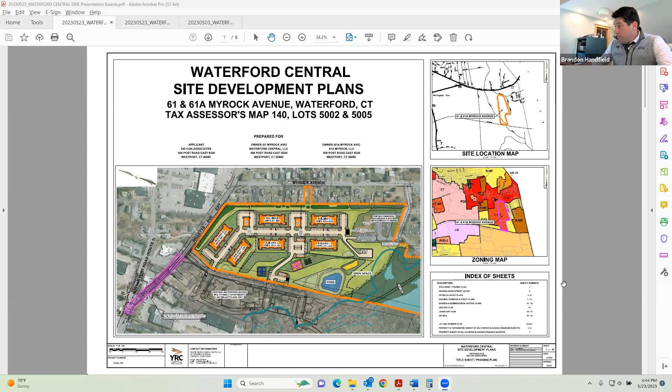So I will go into our proposed development, which consists of 6 multifamily buildings with 36 units each. Going back to the 2022 Design Review Board, these buildings are the same as building E and F that we proposed as part of phase 2 Waterford Woods. So each of these 6 buildings shown in orange, G through L, are the same building that are built on Waterford Woods out back here off the page. We'll get into the architectural styles later, but I want to say you have basically the same exact building that we presented before and are currently under construction.

Access, as I said, to the site will be connected to the existing driveway network, as you can see here. This is actually a Bing aerial map that I was able to pull in to show you the status of construction of Waterford Woods. So you see building A, building B, building C, building D - the foundation was in at that time, it's now almost nearly complete. You can also see the existing intersection with Willetts Avenue here that has been built, and that will be our main access point as well.

In terms of the layout, there will be a looped layout that will connect at the main driveway and head eastward and then southerly, connecting back into Waterford Woods at this rear intersection between building A and building B. There will be a spur that heads out to the south towards Atlantic Broadband that will serve building K and L and the parking for them. However, this will be a dead end, so it will not have a connection out for traffic purposes to the existing Atlantic Broadband development or to Myrock Avenue. There will be a fence installed here that will prohibit any through access except for emergencies and maintenance.

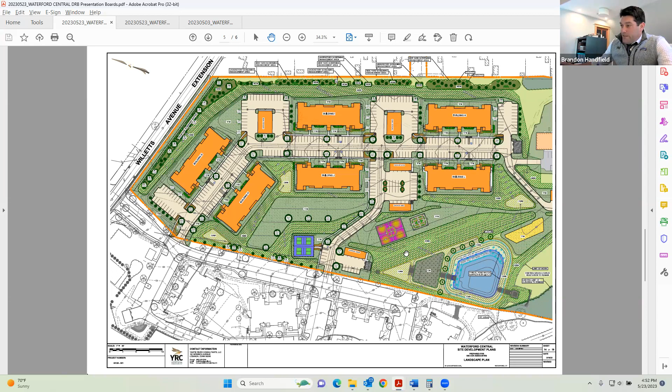And just to bring it to the rear, the last thing I'll point out is this is the existing limit of vegetation or trees, and we are not disturbing that or changing that. Our limit of work is about 80 feet away from that limit of clearing, as you see here, which would be the toe of our slope. Everything from this line to the north would be vegetated.

I can hand it over to John or answer questions now. I'm happy to answer questions at either point.

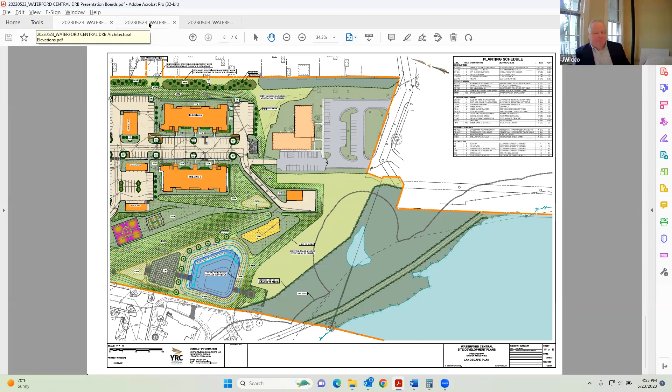So as Brandon said, the buildings are the same as E and F in phase 2. There are 6 buildings of 3 floors each, about 31,700 square feet per building. These are the buildings with 3 entrance towers in between the gables that house the stairs, which access 4 units on each of the floors. So it's that style that's over in phase 2.

The handicap units are on the ground floor, the grade floor. We provided those units with the numbers or letters A and B as the ANSI prescribes.

Notable about these designs, the mechanical units - there's 36 units, 24 condensing units on the roof of the stair, and 12 of the mechanical units are within, you can see on the corners, there's some louvered areas, and those are where mechanical units are housed. So we don't have any mechanical equipment scattered on the site and in the landscaping.

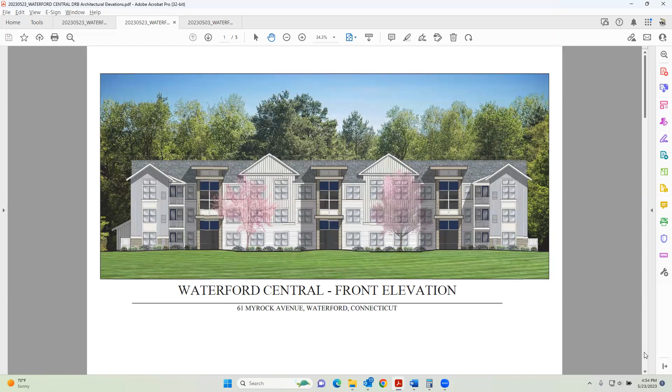The style is the same. We opted for continuity. We're using the same siding materials, which are a James Hardie product, a cementitious siding consisting of some flat panels, board and batten, shiplap type siding. It's mixed in an architectural way to create some uniqueness to the structures and character.

Other materials are corrugated metal on the corner towers, vinyl clapboard in many of the fields left and right of the siding, and different various panels and openings at the 3 stairs at the center. That's a general overview of the buildings.

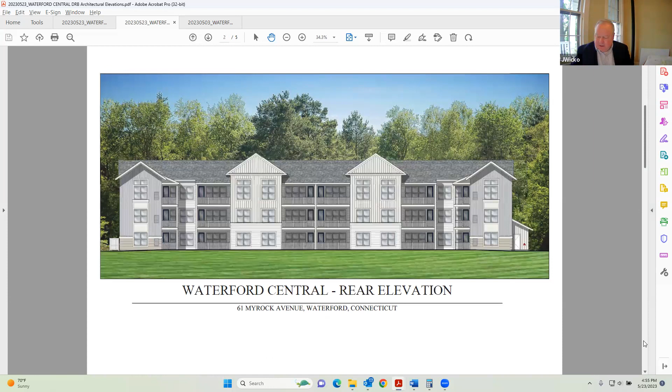The garages we introduced have 3 different styles. Just to note, one of the garage units, I believe it's G400E, which is next to the pickleball courts, we're upgrading to a stepped roof building that has a little more character, and it's more visible to the person traveling through and occupants of the complex.

A very attractive agricultural style building, which all these garages are designed in. Low roof lines, asphalt roof shingles, vinyl clapboard siding for the most part, with accent vertical board and batten. That particular unit, G400E, is a 5-bay unit with an open shed at the side towards the open field in that direction.

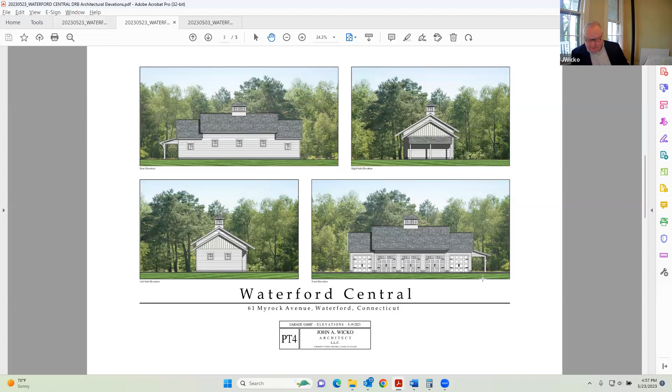The other 2, scattered throughout the site, are the G500 and G600, which are a 10-bay garage, both sides, and it works with the site, the placement of that in between the 2 drives. Then there's 2 other ones, the G700 and 800, which are 5-bay, all having the similar style, with decorative hardware and some nice touches such as that.

That's a general overview of the buildings within this phase, and I can certainly answer questions or explain things further if needed. All right, thank you, John. You're welcome.

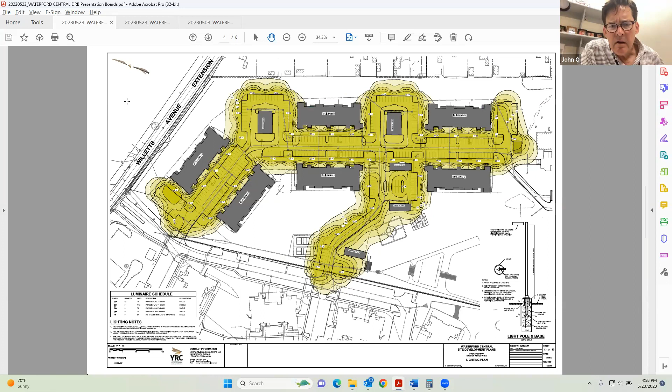Do the board have any questions? I guess just one - I understand why, but I was kind of surprised when I looked at Waterford Woods at the brightness of the colors and the signs used to mark the buildings A, B, C. I understand it coordinates with the door color.

Yeah, that's a feature that the developer uses as kind of a signature, and it's to add some interest, and it really relates to the demographics of the users - they respond very well. He has many other projects successfully using those colors in very interesting ways. Even throughout the interior, there's primary colors with creative artwork, self-developed by the owner also. So it kind of just fills that whole theme - it extends it to the buildings themselves, introducing that color before you go into the inside.

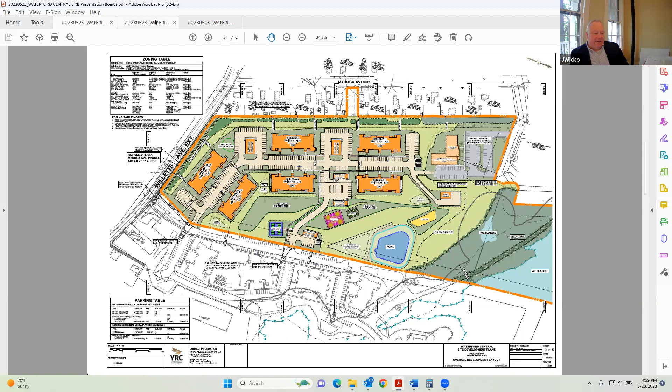So on the garages, will there be accent colors? I believe so - I think I indicated some of that ochre color on them. They'll be the same color, so it won't be spotted, but we will vary the colors from garage to garage.

Any other questions? All right, questions, John? Bob? No, I don't have any questions.

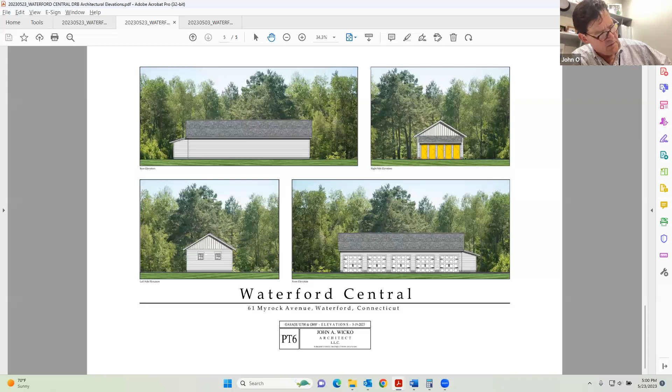Okay, yeah, it is a large expansion, but it's well off the road, and there's some nice screening going on to Willetts Avenue there. We've already approved the earlier phase in the same style, so it's kind of a done thing there. Any other comments?

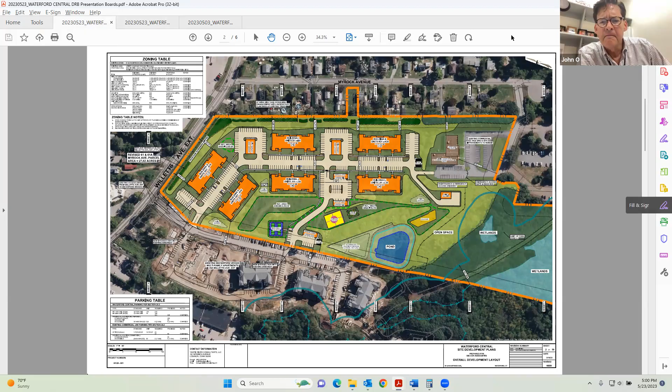Any other comments, Bob or Joy? No, I'm all set, John. Good, all right.

Is there a motion to approve this plan? So moved. Second. All in favor? Aye. Aye. Very good, thank you very much, gentlemen, appreciate it.

Minutes from the last meeting. That was the April 25th meeting. Any comments?

I move the approval. I'll be the second. Joy, second, very good. All in favor of approving the minutes of April 25th? Aye. Aye. All right.

Terrific. Is there any other business? Are there any things coming up that will be coming in the next couple meetings?

We anticipate at this point that you'll be looking at a revision to the car wash building that was approved a little while ago. They're coming in with a total change of design. Initially, the building looked more northwest coast style - blocky, tall. Now they're coming in with more of a New England style - a cape, an A-frame roof, brick, with a car wash. Because it's such a drastic change from what you initially saw, we're requiring them to come in front of the design review board. This doesn't require anything from planning and zoning, because they're not making any substantial changes to the site - it's just a change to the building design itself.